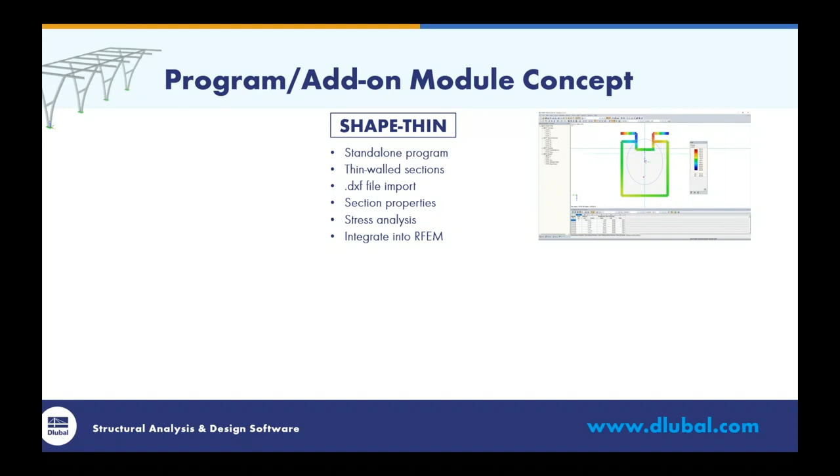Then we take these cross sections along with their properties and integrate them into our FEA program, RFEM. RFEM is a separate program, and this is where we can model our structure entirely. We also can integrate with BIM software such as Revit, Tekla, AutoCAD.

We can fully load the structure. We can set up our load combinations, again, according to the ASCE 7, as well as many other international standards, and eventually we get a full analysis. The analysis will provide us with design internal forces, deflections, support reactions, and we can take this analysis information into our own tools to do the design.

Now, if we'd like to do design within RFEM, this is where we'd want to take advantage of the design add-on modules. In particular, today we'll be looking at RF-ALUMINIUM ADM. This is nothing more than a dialog box within RFEM that allows us to do member design for aluminum per the ADM 2010, the 2015, and we have both ASD and LRFD.

This does include both ultimate and serviceability design, so we can check deflections as well. This also includes custom extruded sections, which we'll see today, where we take this section from Shape Thin into RFEM and design it per the ADM. Now, this is for unwelded member design. Hopefully at some point in the future we hope to add the welded checks, but for now keep in mind that it is only for unwelded members.

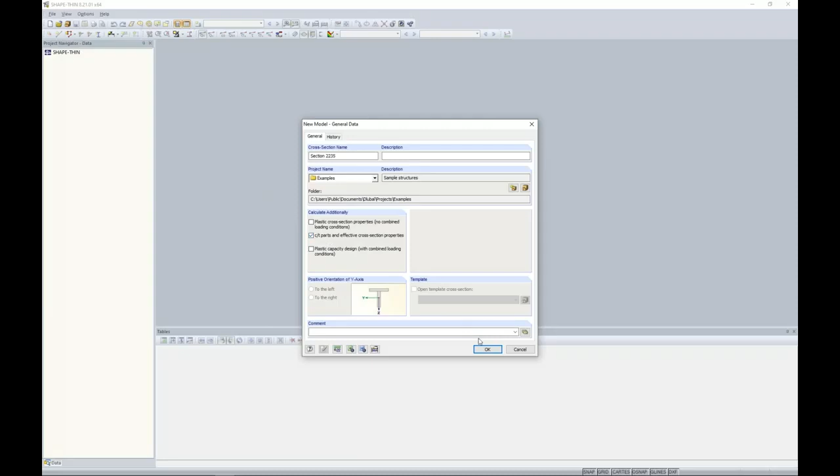This is so incredibly powerful because when we take this information of the width to thickness ratios into RFEM and eventually into the aluminum design module, we can actually check all of them for local buckling. This is not something other programs can do, but it requires a bit more additional work within ShapeThin to define this section, and we'll go ahead and see that now.

When I click import, we are brought into our graphical view where we can place the DXF background layer. There are a few options for how we want to place this DXF file, and I'm going to choose this one where I can further edit it. I select this center node, snap here to my origin point, right click to exit out of this dialog box, and now you can see this background layer here.

It's not so simple that we can just mesh based on this import to calculate the cross-section properties. We need to trace over this background layer again to determine the width to thickness ratios for eventually local buckling. But we do have some powerful tools that allow us to do that fairly easily.

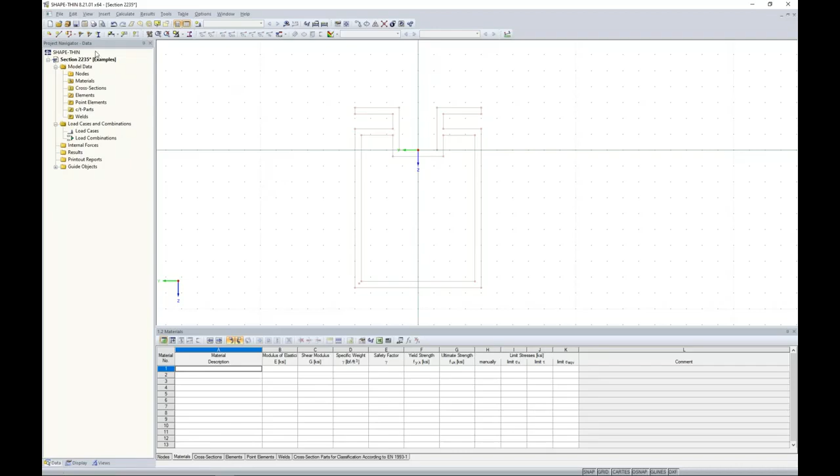Under Edit, we have Set Elements with DXF Template. The first option here is to set the center lines. I can zoom in and select two lines, and you'll notice that the program automatically places a center line between the two selection lines. I'm going to focus for the most part on the left side of the structure, because once I define my elements on the left side, I can mirror it to the right side.

In addition to setting the center lines, we have this fourth option to set the elements. We can manually draw in our elements with a new line, but we want to take advantage of these tools that make our life a little bit easier within ShapeThin.

So I want to set my material right now. I can open up my material database, and you'll see on the left we have our filters. We can filter to metal, to aluminum, to the ASTM, and eventually the ADM 2015. We have quite the long list here of all the aluminum materials directly from the standard. If I want to search for a particular material, I can type in 6061 and see all of the applicable materials, where I'll choose 6061 T6 for pipes and tubes.

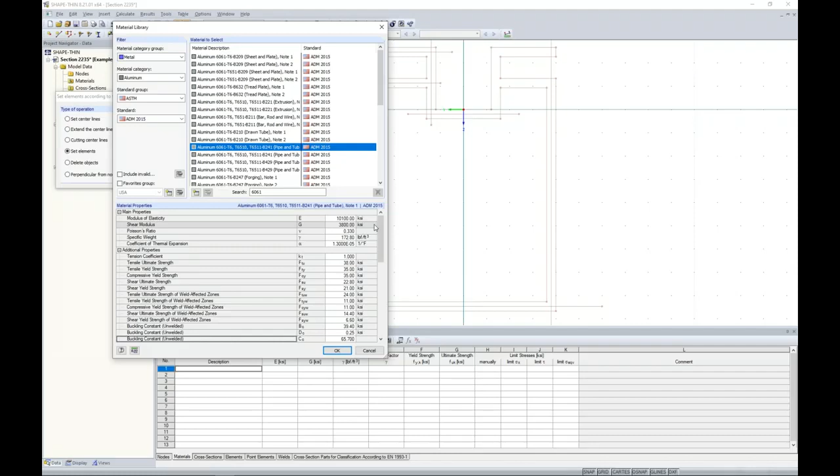Now all of my material properties are defined here. Quite honestly, the material definition is not so important within ShapeThin if you're not doing a general stress analysis, which we're not today. Eventually, once we get into RFEM, we're actually going to have to redefine the material anyway, but this is just a good introduction of where you can find the materials within the database.

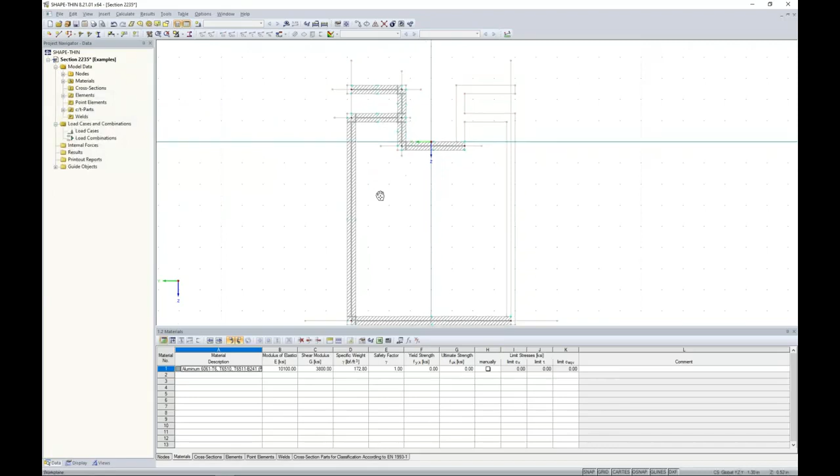Now what I can do is simply click on these center lines, and the program detects where the outside boundary lines are for the thickness of these elements. Once I've completed the left side of the structure, you'll notice up here, I want to drag this one element to the end. No problem, I can just drag and drop it, and it will snap right to that end point.

I can highlight all of my elements and use my mirror tool. The mirror tool is exactly like what we'd find in AutoCAD, where we can create a copy. We mirror about the global z-axis and the origin point. I click OK, and now the program has created all of the elements on the right-hand side. It does create a couple small segments that I can just simply delete with my keyboard.

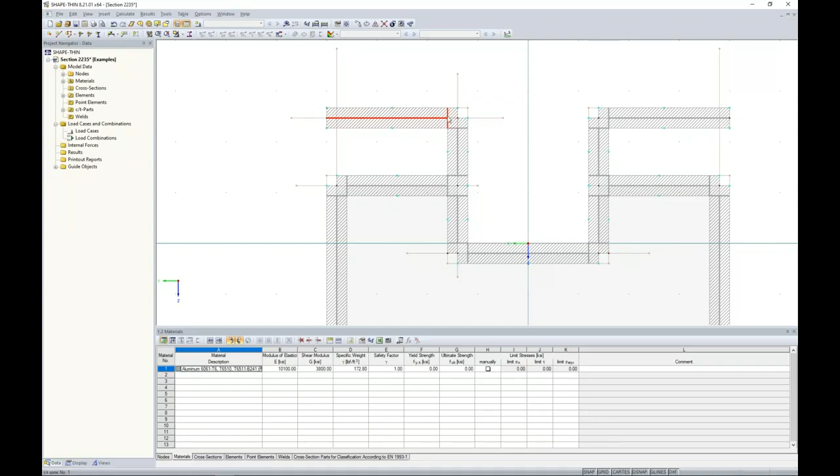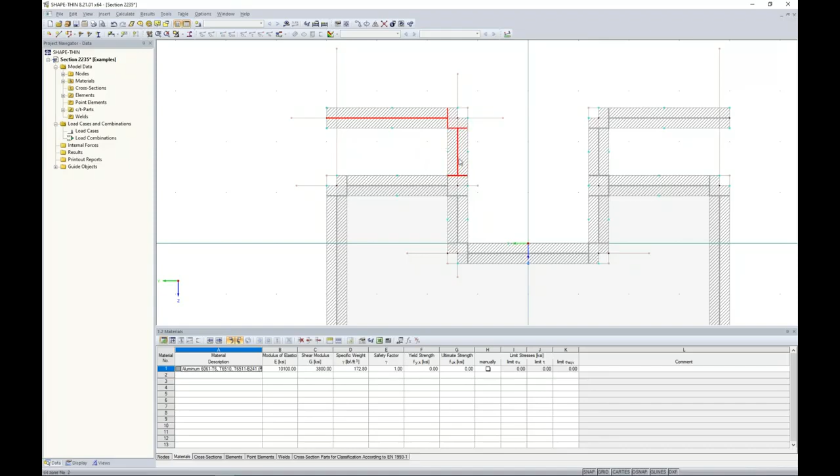Now you'll see these symbols at each element, and this is the width to thickness symbols, those C over T parts, recognizing width to thickness. But even more so, you'll notice that at these closed ends we have what looks like a T symbol, but at the open ends we don't have that same symbol. This is important for aluminum design to tell the program how the edges are supported. On the right-hand side it's supported, but on the left-hand side it's not supported, which again is important for local buckling. When we look at one of these other elements supported on both sides, we see that T-type symbol on both sides.

So that's all that we need to do, and now we're ready to run our calculation to determine the cross-section properties. So when I go to run the calculation, I will immediately get an error, and it says material number 1 FY is not positive.

This is the yield strength for my aluminum, and I can look down here to my table, and the program jumps to FY where it's set to 0. The reason for that is because aluminum has different yield strengths depending on if it's for tension, compression, or shear. So all we need to do is set some type of placeholder here. FY equal to 30 is perfectly fine. That's the reason why the program populates 0 there.

So we can rerun our calculation, and now we can see that we are presented with our results. Most importantly, if we take a look at table 4.1 for section properties, the program has automatically calculated all of the cross-section properties for us, including area, moment of inertia, warping, things like that. So everything has been done automatically according to my calculation.

Now it's very important that I save these results. You have to save the results with the cross-section properties, because in order to integrate in RFEM, we need to know those, and that only occurs with the saved results. We will get a message in RFEM when you try to integrate a shape-thin section without running a calculation first. So that's all that is required from the shape-thin side.

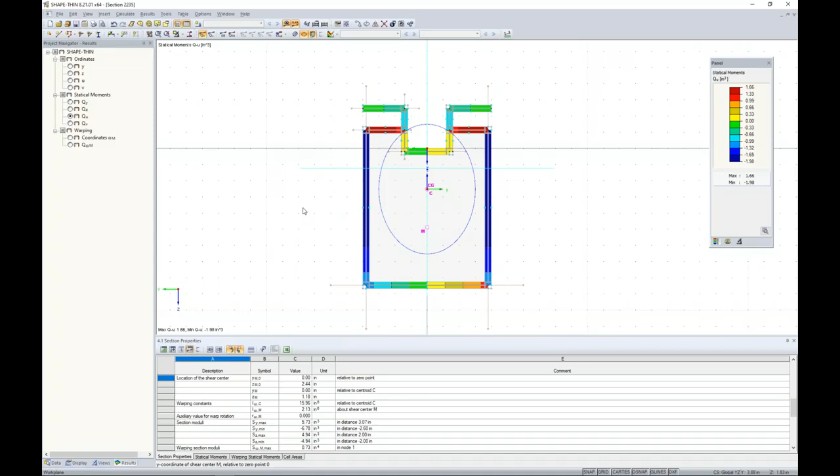So now what we can do is jump to RFEM. And in RFEM, you'll notice it has a very similar interface to shape-thin. So what's great is that if you know RFEM pretty well, then shape-thin should come pretty naturally.

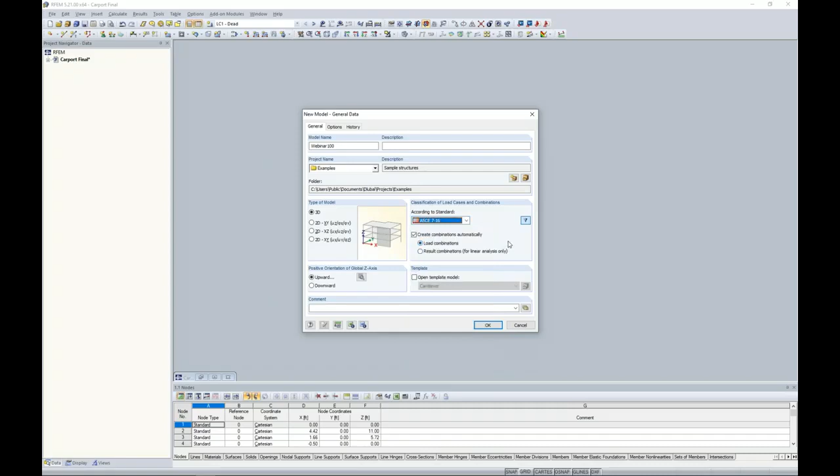We want to give this one a name, so we'll call this one Webinar 100. The type of model is 3D. We can generate the load combinations automatically according to the ASCE 7 2016. Now you can see in this drop-down box we have many other international standards as well, including the NBC 2015. You can always uncheck this checkbox here, and what this allows us to do is manually create the load combinations instead. But today we want to take advantage of the load combination generator, so we click OK, and we are brought into our main program RFEM.

So to give a quick overview for those of you who are not familiar with RFEM, we have our graphic window right here in the center, and we'll begin to model our structure, and we'll see that built up visually here. Down at the bottom is our table, and we can always import and export data to and from Microsoft Excel. This includes our results that will eventually be presented to us in table format as well.

Over on the left is our project navigator. So as we begin to generate this model here, all of my input data, including my loads, my load cases, combinations, will be all available to me within the project navigator so that I can make quick changes to entire cross sections or to entire material groups.

If we scroll down a bit further, this is our long list of add-on modules. This again is why we have the concept of only pay for what you use, because quite likely you won't utilize most of these add-on modules depending on the materials or the international standards that you utilize for your projects. And finally, we have our tools up at the top, which we'll be utilizing today.

And that brings us to the creation of our first column here, where we will go up to our quick tool here to draw a new member. So when we choose this option, we want to select the member type beam.

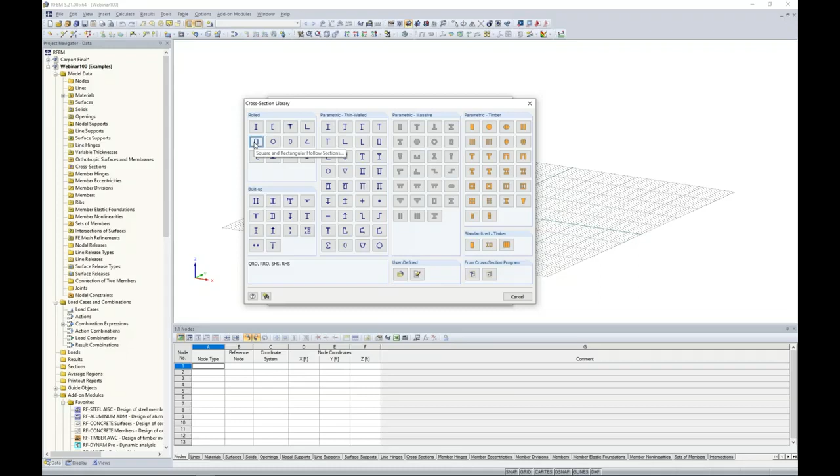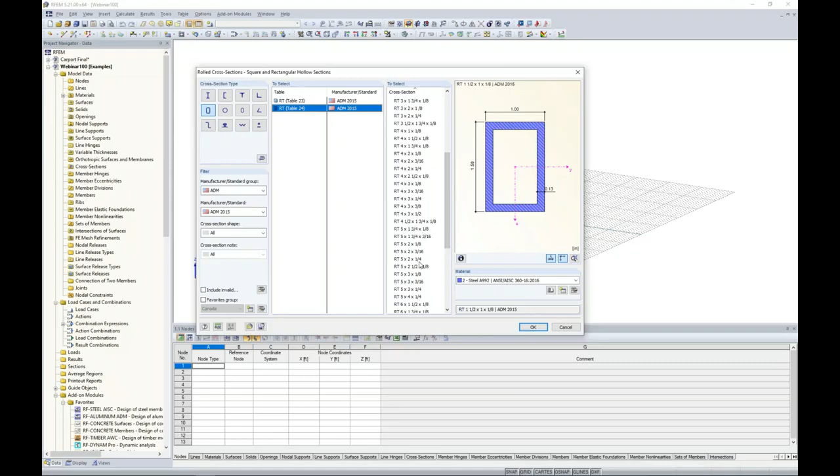We can open up our cross-section library. For aluminum sections, we will probably typically be working with the parametric thin-walled sections, or we can take advantage of the ADM sections directly from the standard itself. So with that, we will choose a hollow square section for today. I click on my HSS sections, I filter over here to the ADM, and we'll see an additional filter to the ADM 2015. Now for my first column, I want to select a 5 by 2 by 1/4, and I can just choose it right here in my drop-down box.

Now the material by default when we first open up the program is 4,000 psi concrete or steel A992. So what we need to do is to choose a new aluminum material from our database.

Well, that's quite easy by launching our material database, and this should look very familiar - it's almost exactly like what we saw within Shape Thin. We can use our filters over on the left to filter to metal, aluminum, ASTM, and the 2015. Once again, I can type in 6061 and select 6061T6 from my list here for pipes and tubes.

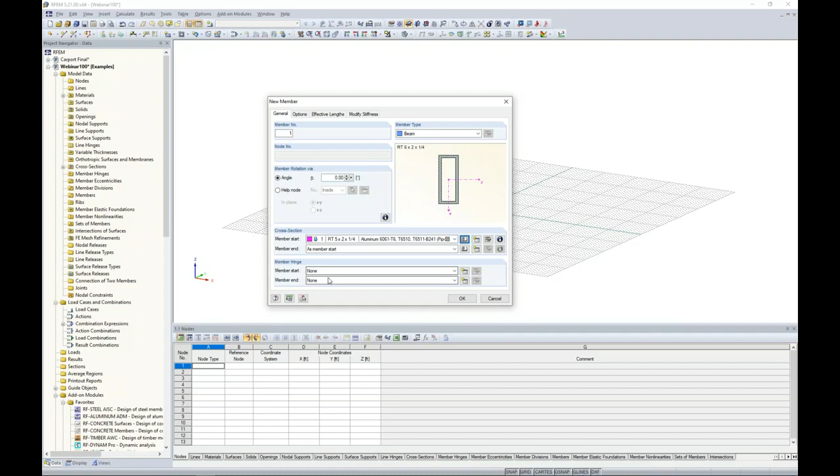All of my material properties are presented in this table. I click OK, I click OK. Just to preface this, our model today will be fully fixed, but if you wanted to set a pinned member end, you would do so within the same dialog box by creating a new member hinge. Leaving everything fully fixed is what the type none means, so we'll go with that for now. We want to begin by drawing our column, but I want to change my drawing grid here to the vertical direction. I can do so by changing my work plane into the XZ plane.

I can scroll down, and instead of a straight line, I actually want to create a curved column by selecting an arc here. So I snap to the origin at 0, 0, 0, and then my second point can either be defined on my work plane, but in my particular case I don't have exactly 1 foot increments for my second point, which is the default for my drawing grid. So what I can do is just type in the coordinate points directly at 4.42, 0, and 11.

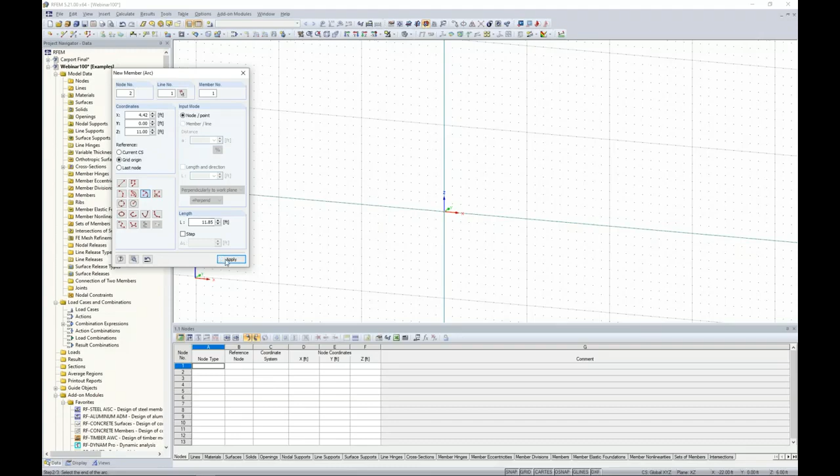Now you want to make sure not to drag your mouse outside this dialog box because, as you'll see, everything resets to the current position of my mouse on the work plane. So we'll retype that at 4.42, 0, and 11. We scroll down here to apply. Now you can either define the radius by clicking on the work plane, or I can just type in 30 feet on my keyboard and hit enter. And so now we should see the curved aluminum column shown here.

In a similar sense, we want to go back and draw a new member, taking advantage of the exact same cross section and material. I click OK, and we want to create another curved member, so we'll choose the arc option. Now my first point again doesn't fall at these 1 foot increments, so I can specify negative 0.5, 0, and 0. I click apply. Now my second point is going to be negative 3.5, 0, and 11, and I hit apply.

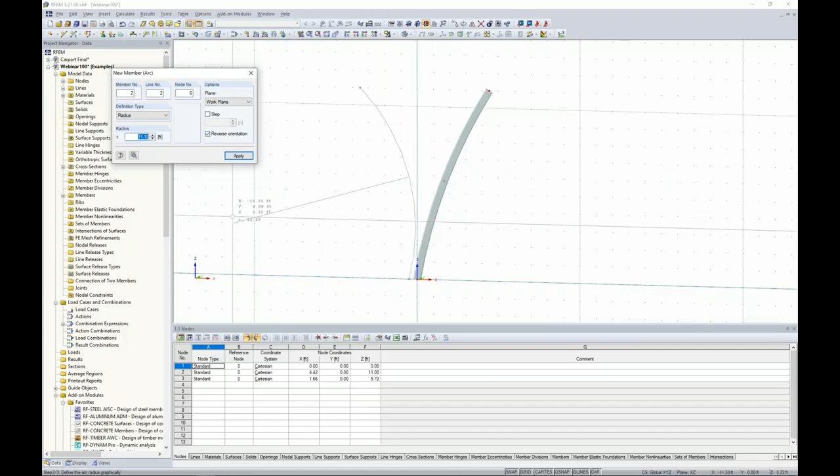Now you'll notice that my radius is actually curving the wrong way. That's no problem, all I need to do is check the checkbox for reverse orientation. I'll type in 40 feet on my keyboard and hit enter. And so now we have our second curved aluminum column here.

The next thing to do is to apply some type of intermediate brace between these two columns, and I want to do so at some nodes along the member length that I need to create. So I can right-click on my right column and divide the member by a certain distance. With this distance I have the opportunity to choose the projected direction Z. So what I want to do is add a node that is 5.5 feet in the vertical direction starting at the base of the column.

You can see here which side is the member start and the member end based on this black arrow. I type in 5.5 feet for my member start. I click OK, and now I have divided this member, which has created an intermediate node there.

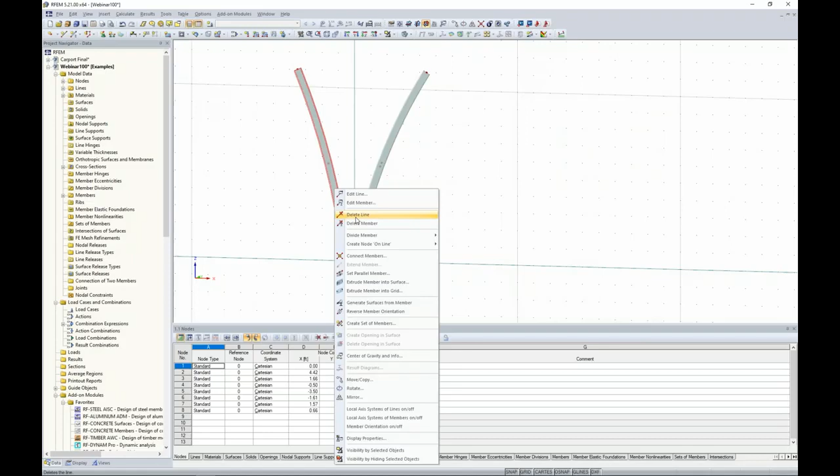I'm going to do the same thing with the left column. I'll right click and divide the member by a certain distance. Again we're going to choose the projected direction, but this time it's going to be 4 feet from the member end. You'll notice that we have the reverse orientation for this column, which is no problem at all. So now we have split apart this member as well.

I want to go back to drawing a new single member, and once again I'm taking advantage of the exact same cross section and material. I click OK, but this time instead of the member being a curved element, it will be straight, where I can snap to those new nodes that I have just created to add a small intermediate brace here.

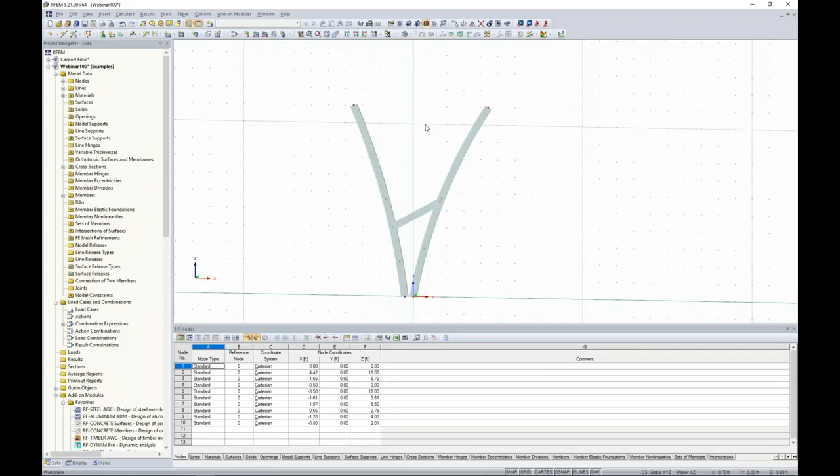Okay, so moving on to the top of our carport canopy structure, we want to import in that SHAPE-THIN section. So what I can do is draw a new member, which we are very familiar with, and open up my cross-section database. You'll notice that once this populates over on the right-hand side in the lower corner, we can import the cross-section from SHAPE-THIN.

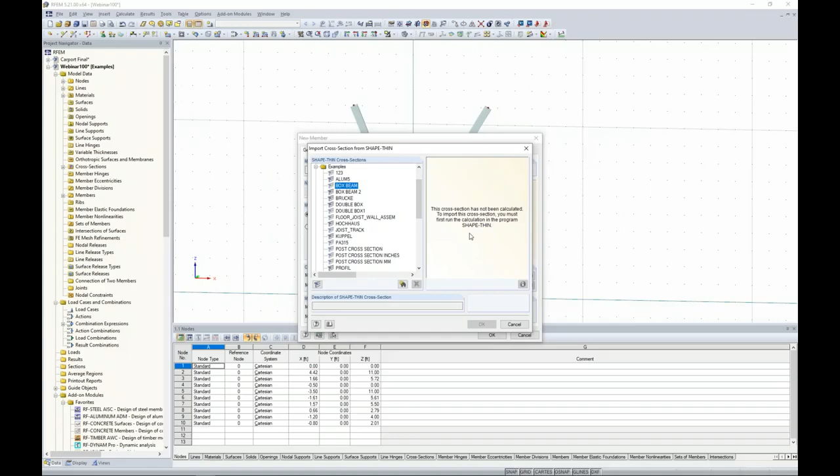So when I do this, we will browse to the file location of where I saved my custom cross-section, so we can see it here. By the way, if you were trying to import a cross-section where the results weren't saved, you would see some type of warning or note like this, just telling you the cross-section hasn't been calculated, go back to SHAPE-THIN and do so. This is why the results need to be saved with the SHAPE-THIN file.

So we can see here section 2 that we have just created. We want to import that in. Now notice when we did that, it defaulted to the first material, concrete 4000 PSI, that we have available in our model. So we actually want to edit the cross section, and instead of concrete, we're going to choose the aluminum material that we've already defined in the model, so it's now always available for any additional members that we create within this file. So I choose aluminum 6061. We can see here that everything looks okay with the material and the cross-section set now.

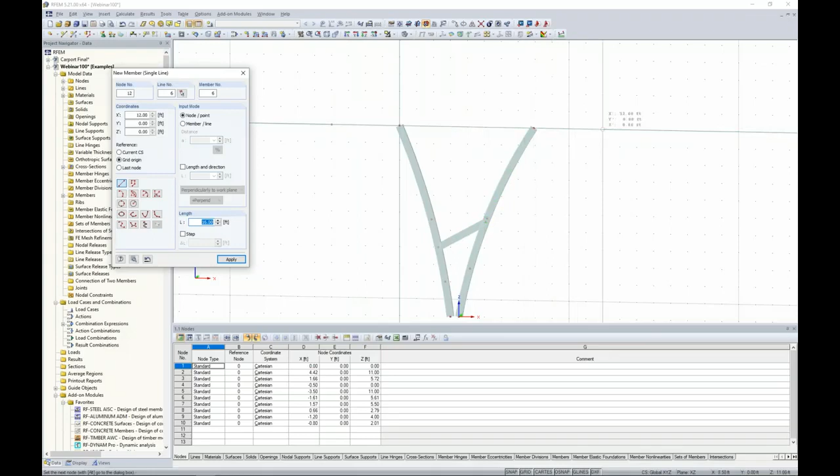I'd like to move my drawing grid so that the origin is now placed at the top of the left column. I can do so by selecting this button up here to set the origin of the grid work plane, and I move to the top of the left column. Now I'm still within the dialog box option to draw my new member, so I'm going to choose a point that is about 4 feet away from the top of the column on the left, and we will span about 3 feet to the column on the right.

What's also powerful, if I turn off my drawing grid here and zoom in, is that we do bring in the exact rendered view of this custom cross section. So it's somewhat nice to see the orientation of the member and how it's framing into these columns that we have just created.

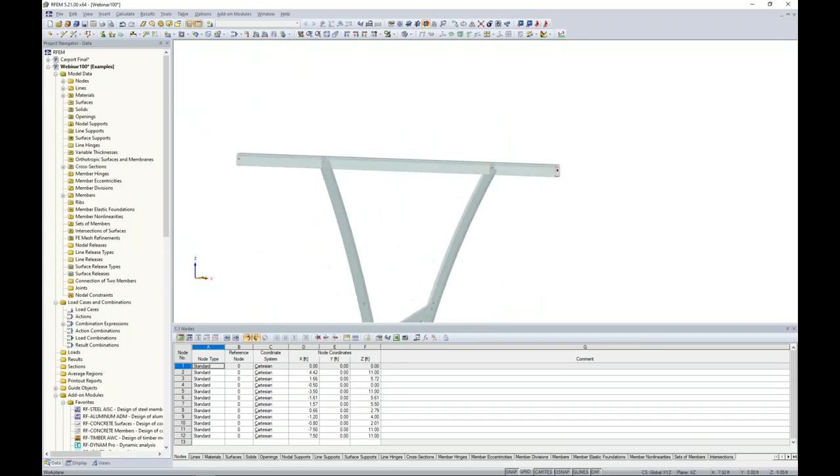So once we have created this main beam up top, I'm going to hold down my control key and select only my members. You'll notice that I'm paying careful attention to not select the nodes, but there are a couple nodes that I do want to include. So by holding down my control key, I'm going to select the node at the top of my right column and the rear node. Now there is a specific reason why I'm doing this.

I want to go to my Move Copy tool in my toolbar. Move copy, nothing too fancy about this. We want to make 6 copies in the global Y direction of 4.5 feet. Under the Edit Expanded Settings, what we have the ability to do is create lines between copied nodes. So this is why I was careful to only select a couple of nodes that I was interested in. And even more so, we can assign a cross-section to those lines.

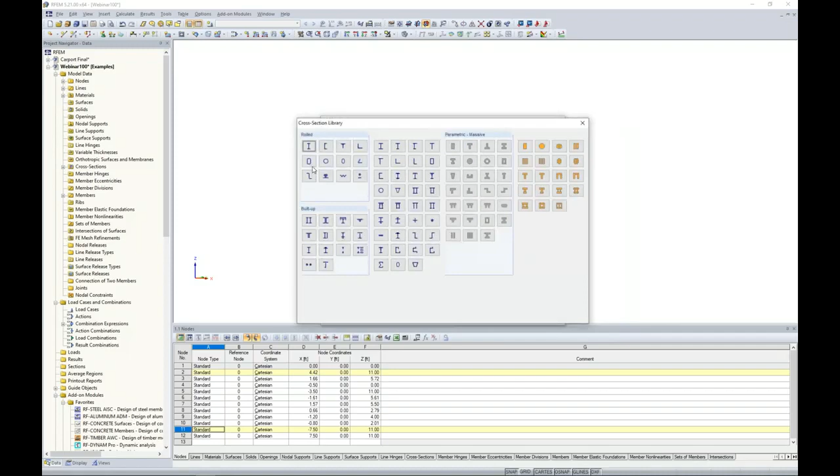And we can create a new cross-section type by going to a new member. This should bring us to a familiar dialog box where we can launch our cross-section library once again, because I do want to create a rectangular hollow section here. So I choose this option, and over on the left we will see our ADM filters once again, and I can scroll down in my list to choose a 3 by 3 by 0.125. I select my material from this drop-down box. Remember, it's already available to us because we have defined it within the model.

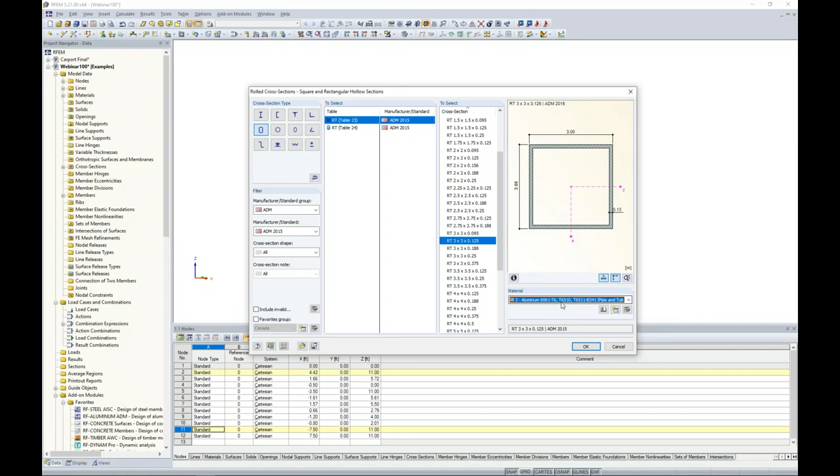I click OK, I click OK, and we're back in this Move Copy dialog box. I click OK once again, and what you'll notice happen is that not only did we make copies, but the program has placed these intermediate beams between our copied frames. So it's just taking a step out of the equation where we don't have to manually draw these beams in here. I want to take a few of these main frames, and I'm holding down my control key and selecting them, and I hit delete on my keyboard because they are not necessary.

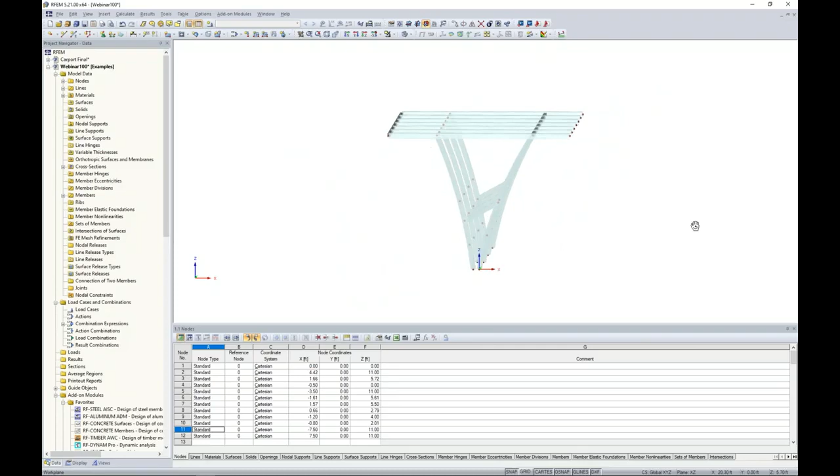So now we are presented with, for the most part, a majority of our modeling done with the carport canopy structure. A couple things to add. Number one is that if I wanted to slope this roof at 5 degrees, normally with sloping the roof it might be a little bit difficult because we'd have to figure out at what elevation all of these nodes should be placed, depending on their distance away from where the slope should begin. But we do, once again, have a nice feature within RFEM that allows us to do that automatically.

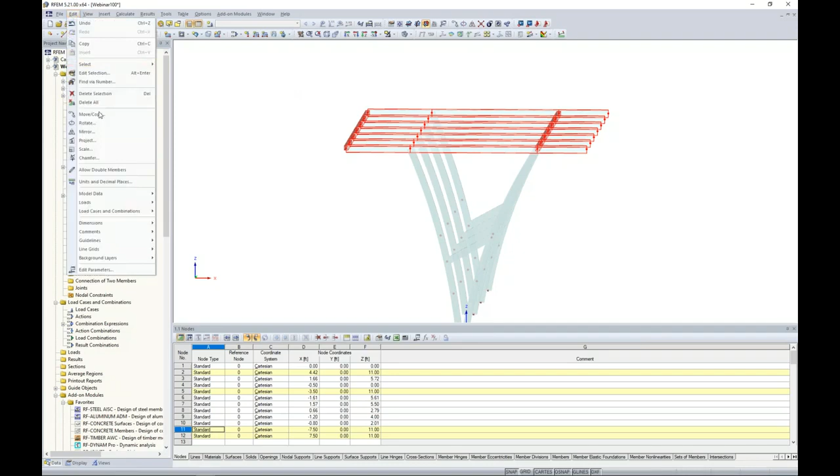So I select all of my roof members here, and under Edit, we have the chamfer tool. With the chamfer tool, we can define an angle of -5 degrees. We want to rotate it about the global y-axis, and we want to rotate it in the direction of z. Then I can graphically pick the point where I'd like the rotation to begin. So I choose at the top of my right column any one of these points. The program populates the coordinates.

I click OK, and now my roof has a 5-degree slope to it. So again, just a nice feature so that we don't have to manually determine what all these different elevations are based on a 5-degree slope.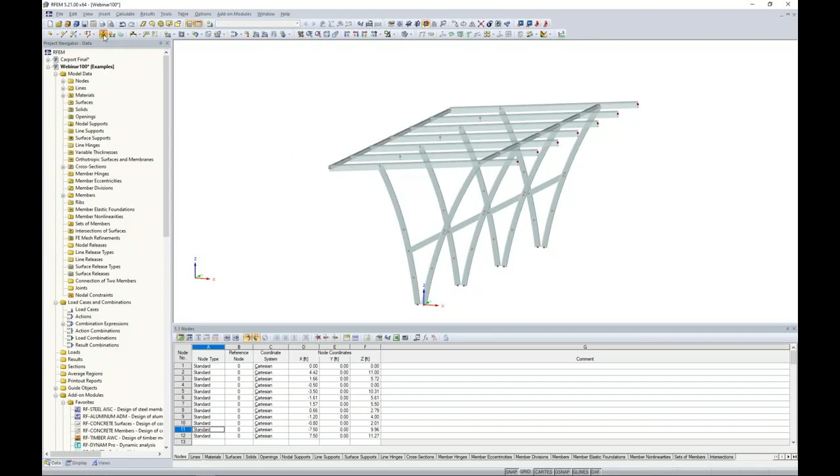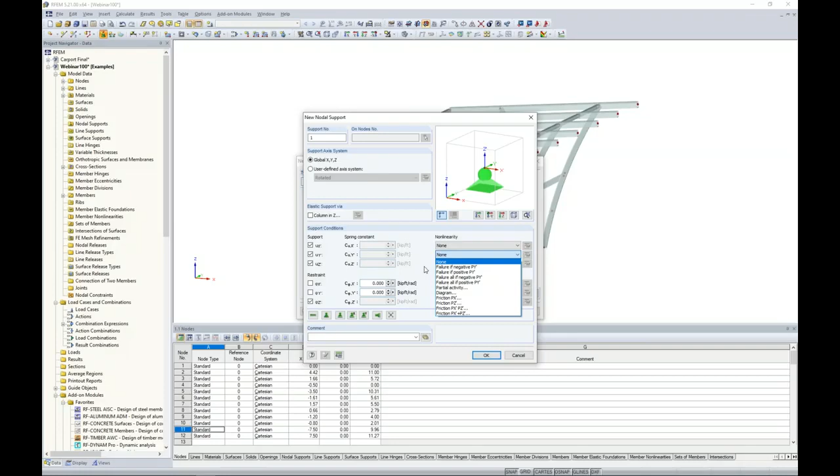The last and final thing to do with modeling of our structure is, of course, to support it. So we can go up here to a new nodal support. Now we have a few default options, including hinged and rigid, pin type support, or fully fixed. We can always create our own type of nodal support, which you'll see are 6 degrees of freedom here for rotation and translation. If you have partial fixity for somewhere in between fully fixed and fully released, you can set that. Or because RFEM is a nonlinear analysis program, you can set these geometric nonlinearities so that perhaps the support fails in uplift, for example, or sliding or friction or anything of the sort with partial activity. For today, we want to choose the default fully rigid option.

I click OK. All that I need to do is to highlight across the bottom of my structure, and now those fixed supports are applied to the bottom of those columns.

So we are essentially done with the modeling, and we want to move on to loading. And what we need to start off with loading is, of course, defining our different load cases. We can do so within the option up here to define a new load case. This will bring up our load cases and combinations dialog box. The first load case to create will be dead load. The action category is set to dead. Action categories are important because this tells the program exactly what load factors to apply to each load case based on the ASCE 7 or whatever standard you're using for the automatic load combination generation.

The self-weight is automatically checked here for dead load, but when we create a new load case, and we'll call this one live load with the action category of live, we want self-weight to be unchecked because we don't want to account for it twice.

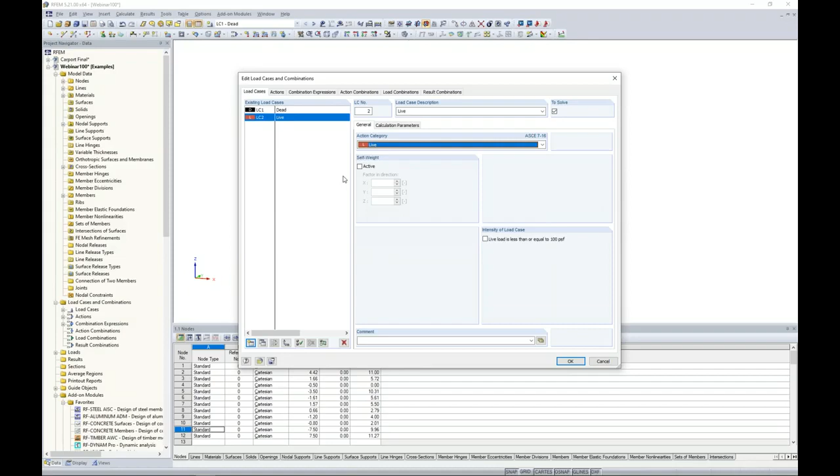Now, because this is a carport structure, maybe we want to consider the possibility of impact loads. Perhaps a car could unfortunately drive into one of these columns, and we want to account for that. So we'll create a couple of additional live load cases for impact. We'll call this one Impact 1, and the action category is set to live. We can make a copy of this load case and rename it to Impact 2.

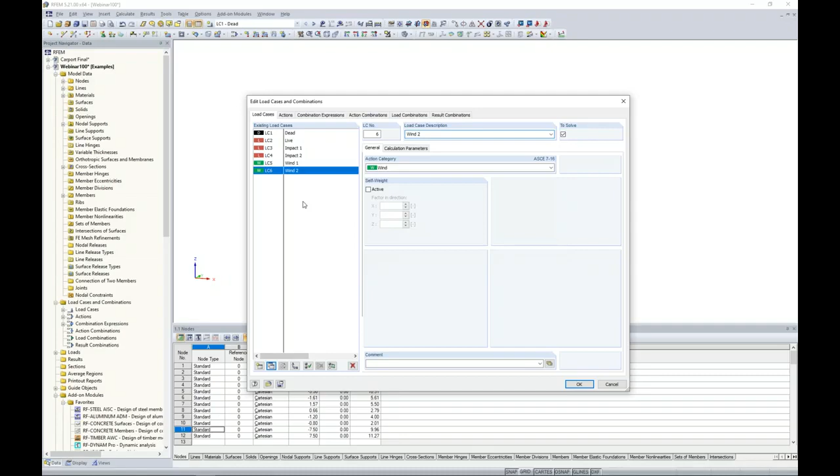I'm going to create a load case here for Wind 1 with the action category of Wind. Once again, I'll make a copy of this one and create a second load case for Wind 2. Now, of course, you'll probably have many more load cases for your project design, but for today's example, we will just stick with these.

So under the Actions tab, this is important because here are my actions that I've defined: dead, live, and wind. Now, under live, I have my live load, which will be some type of area load at the top of my roof structure. I want that to always be acting within these load combinations, but Impact 1 and Impact 2, I don't want everything to act simultaneously as we have it set here. Instead, I want Impact 1 to apply or Impact 2 to apply along with the first live load. So how we can do that is by setting the option differently here.

Live load can be set to no group, Impact 1 can be set to group 1, and so can Impact 2. So now the program will apply Impact 1 or Impact 2. Alternatively, it will not apply them at the same time. It's a similar concept for wind load. Wind loads are automatically by default set to alternatively, so it won't apply wind load 1 plus wind load 2, it will apply wind load 1 or wind 2 within our load combinations.

The combination expressions, this is just the program letting me know that it will create LRFD load combinations as well as ASD load combinations. If we have any question about what those load combinations look like, we can click this little info button to see them listed directly from the standard.

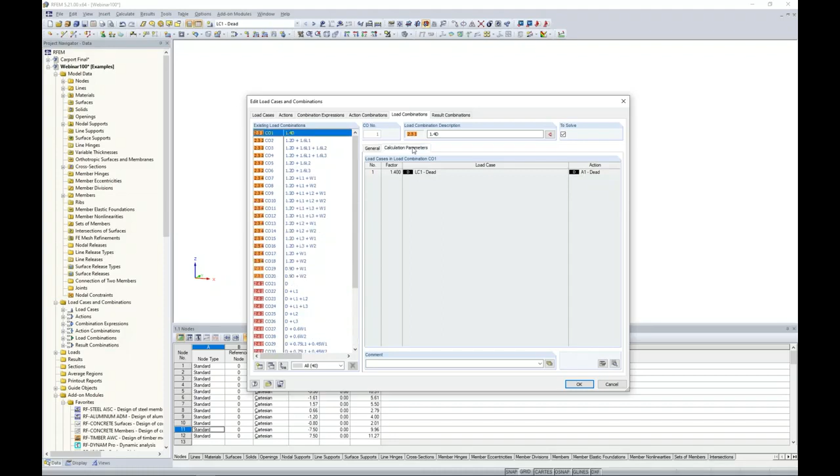Now, probably most important is the actual load combinations tab here, because this is going to show me all of my LRFD load combinations in orange and then my ASD load combinations in red. The calculation parameters for load combinations by default is set to second order analysis, considering both big P-delta and little p-delta for all members.

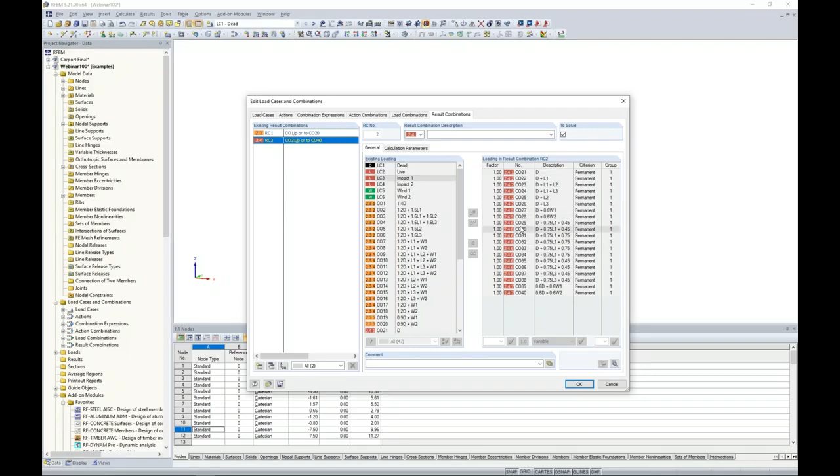The result combination is nothing more than an envelope solution. The program creates a result combination for all of my LRFD load combinations, and we have a result combination for my ASD load combinations. This allows us to graphically or within tables see the max and min results within all of these load combinations combined, essentially just a result summary.

Once we are done defining our different load cases here, we need to actually apply the loads to the structure. So we're going to select dead load from my drop-down box here, and I want to apply a downward area load to the top of my structure to account for, let's say, some PV panels that will be placed on top.

Under Tools, we can go to Generate Loads from Area Loads on Members via a Plane. Rather than having to manually define what all these different member loads are based on their tributary area, the program can do that for us. So we choose the load direction in the global Z, which will be the downward direction, and give it a magnitude of negative 0.02 kips per square foot.

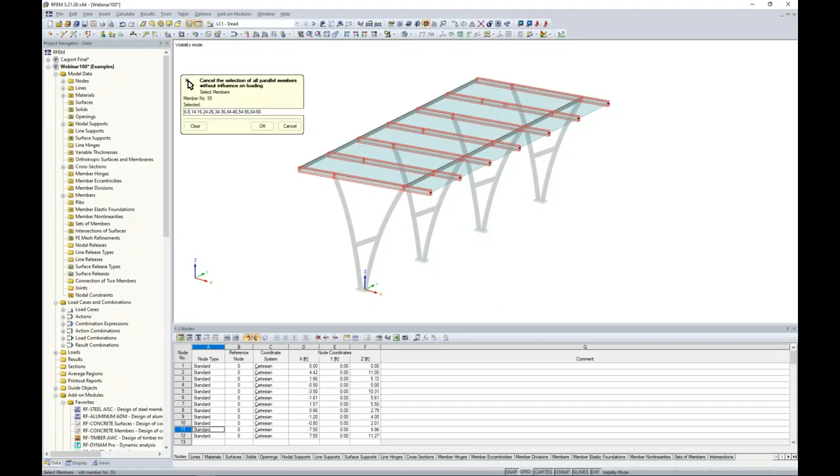I am going to select my corner nodes here by just graphically clicking on the four points. Now we also have the ability to exclude members parallel to a particular member. What I mean is I can select one of these intermediate beams framing in and out of the page. Once I select one, you'll notice all the rest are unselected if we do not want the load applied to those, but rather to our main beams instead.

I click OK, and now you can see our area load generated, but even more importantly, if we right click and display separately, we can see the area load magnitude split up for each individual member based on its tributary width. We now want to scroll to live load, and it's the exact same concept here.

We'll go back to Tools, Generate Loads from Area Loads on Members via a Plane. What's nice is that the program remembers all of my settings from the previous application, so all I need to do here is change my magnitude to something slightly smaller. I click OK, and now for live load, you can see the member loads applied based on their tributary area.

Now for impact load, this comes from ASCE 7-2016, specifically section 4.5.3 for vehicle barrier systems. The code tells us that for impact loads, we should consider a 6 kip load applied anywhere between 1 foot 6 inches to 2 feet 3 inches above the floor.

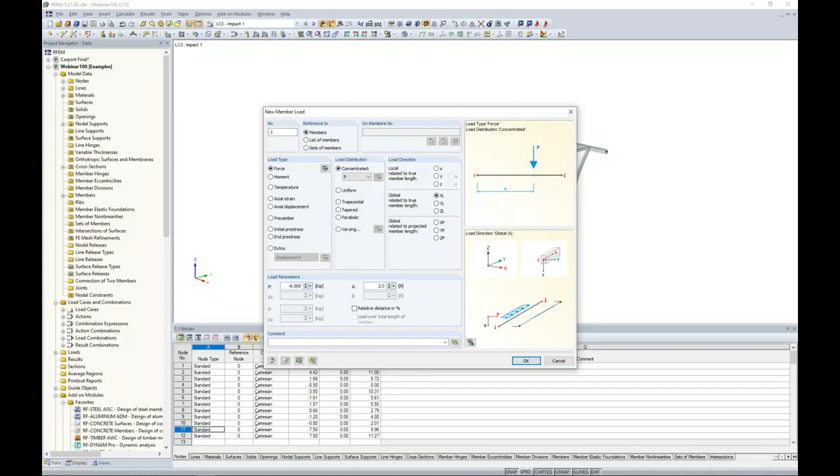For this application, I want to consider an impact load on my center columns here. I'm going to go to a new member load, and instead of applying a uniform load, I can just change this to a concentrated load. With a concentrated load, we want to apply this in the global X direction, the lateral direction, give it a magnitude of negative 6 kips, and apply it 2 feet from the member start. So I click OK.

Then I can just click on my column directly to apply that impact load. I scroll to the next load case, impact 2, and you'll notice my option to apply loads is still active, so I can easily click on my column for the next load case to apply my second impact load. I right click to exit, and now as we scroll to the two different impact loads, you can see why we wouldn't want these acting at the same time, but rather wanted either one or the other.

Now, of course, maybe we'd want to add some impact loads to our exterior columns as well, but we'll just keep that for the simple application for today.

Now for wind loads, we do have an automatic wind and snow load generator. The snow load generator would be efficient for this canopy type structure. The wind loads unfortunately cannot be used because we only have partially enclosed and enclosed structure options for our wind load generator. Typically for canopies, you would be considered an open structure, so we will need to manually apply our loads for today. So what we want to do is just go back to the area loads on members via plane in order to apply those.

Before I do, when we're manually taking a look at these calculations for our wind loads based on open structures, or maybe we have some spreadsheets to do so, I just want to touch on a tool that we have on our website. If you go to dlubal.com and under solutions, you'll see the GeoZone tool.

What we have done is integrate the maps for snow, wind, and seismic directly from the ASCE 7. You'll also see the NBC standard as well as many other international standards. This is also integrated with Google Maps technology, so for our project we can type in the location address, or we can click directly on the map.

We're looking at wind for risk category 1 here. We can see that the basic wind velocity is set at 105 miles per hour. So this is just a little bit more efficient than opening up the code and having to flip through all those different maps. You can take advantage of this.

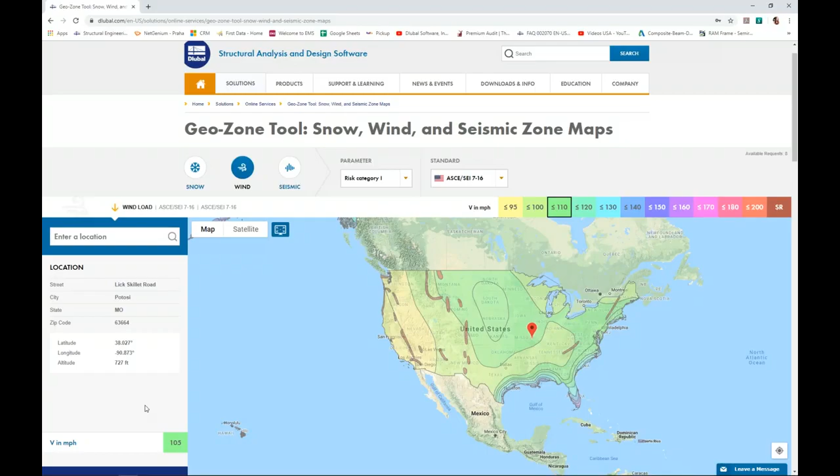So assuming we have taken this information and determined what our magnitude should be for our structure today, we want to apply this in the lateral X direction. Applying this to my roof structure, we set the magnitude to negative 0.01 kips per square foot. The program remembers all my settings from my roof. Maybe I exclude the option to set members parallel to member, which removes the influence from it. I click OK, and now we should see this area load applied in the lateral direction to our structure.

In reality, we'd probably want to apply some lateral loads to our columns as well, but for simplicity, we'll just move on with this lateral application.

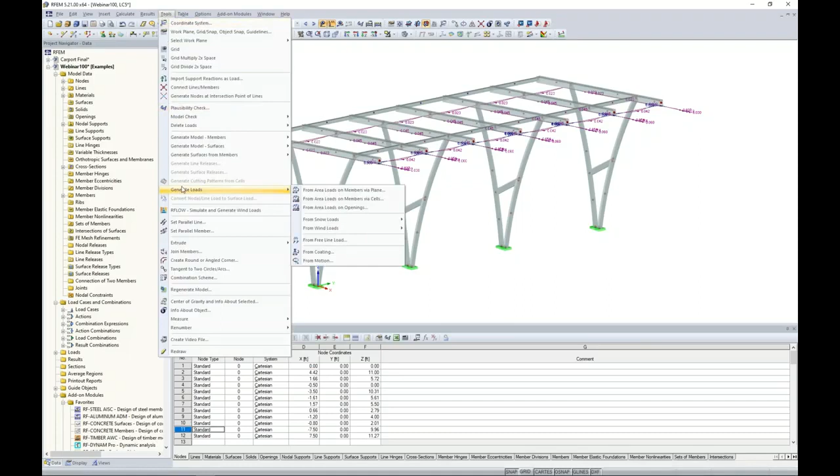So under tools, we also want to apply a downward load. For this, we can modify the load direction to the global Z direction, modify the magnitude to negative 0.005, and maybe exclude those intermediate beams from my downward wind loads. I click OK, and now within this same wind load case 1, we can see a downward wind load along with the lateral load applied.

Now, a nice trick is that for wind load 2, I'd like to essentially keep the same load application, but just modify either the magnitude or the load direction. So instead of going back and once again applying our area loads with the load generator, we can go to load cases and combinations.

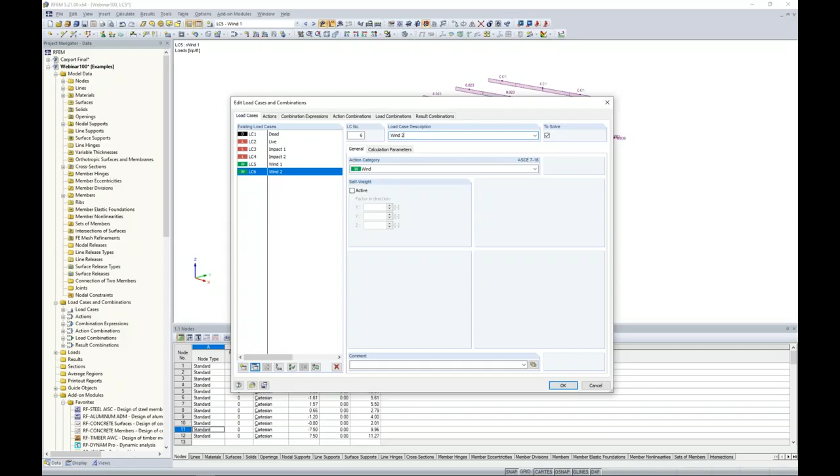I'm going to take wind 2 and completely delete it. So now when I take wind 1 and make a copy, renaming it to wind load 2, the benefit is that since I've already applied my loads to the load case, it will copy the loads along with the load case to wind load 2. When I click OK, I've copied all those loads from wind load 1, and now I'm looking at wind 2.

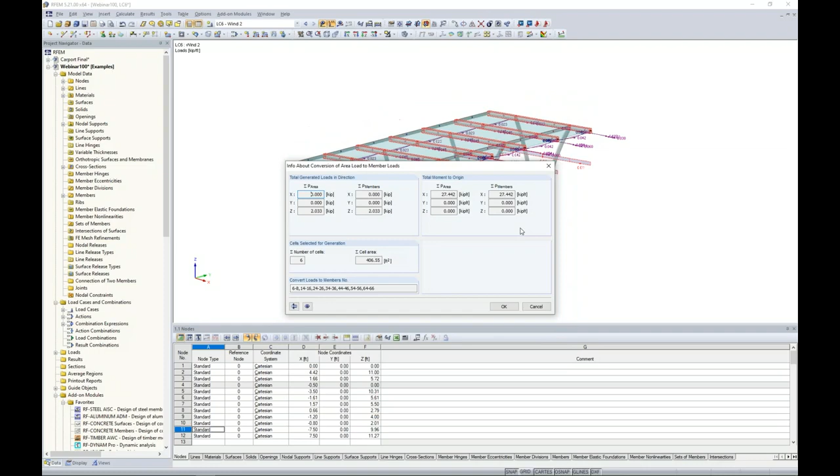All I need to do is double click at my top load here and reverse the orientation, reversing the magnitude for an uplift force instead. So that's just a nice way to quickly redefine loads by copying the actual load case itself.

So now that we have defined all of our different load cases, we can scroll through to the different load combinations and see these applied to the structure at once, including live loads, impact loads, and wind loads. Everything is shown here.

Now, before we are ready to run our analysis, there is one thing I want to discuss from the ADM, and this is the stability requirements according to section C2.

I actually did a previous webinar, around 2 years ago, but everything is still applicable to design today according to the ADM 2015. I went into much more detail about the stability requirements in Chapter C, so certainly refer to that on our YouTube channel or our website. You can just search ADM and that will bring up that previous webinar.

But today, what I do want to apply is the reduced stiffness requirements from section C2. The code tells us that we need to reduce the flexural stiffness by a tau sub b factor. The tau sub b factor is an equation, and it needs to be iterated based on the axial forces within our member.

Additionally, there's a 0.8 factor that should be applied to bending and axial. And lucky for us, these requirements are almost identical to what the AISC requires.

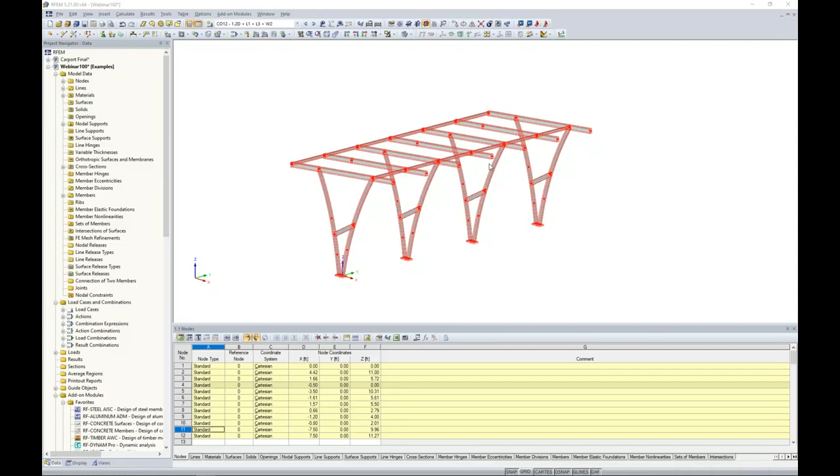What we have in the program, when we highlight all of our members, we can right-click to edit the member. When this dialog box pops up, you'll see a Modify Stiffness tab, which allows us to modify the stiffness according to the AISC 360.

Again, the ADM 2015 lines up exactly with the requirements from the AISC. We will determine what that tau sub b factor is, and we will also apply a 0.8 factor to the flexural and axial stiffness. This will be applied to all members that contribute to lateral stability. It's also a conservative approach to apply this to all members, including gravity members.

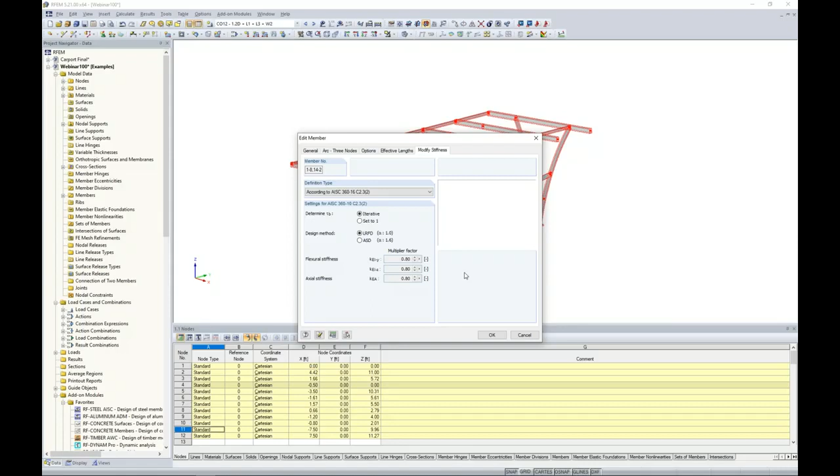So I click OK. You might be asking yourself, okay, the stiffness reduction is great for my design combinations for the ultimate limit state, but for serviceability or deflection, I don't want to reduce that stiffness. So how do we separate that out?

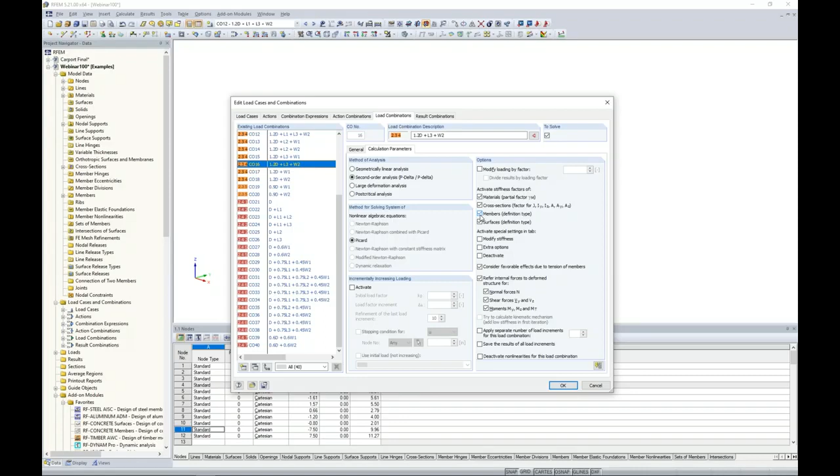We can do so directly within our load cases and load combinations tab. I can select all of my ASD load combinations by holding down shift. Under the calculation parameters, we have the ability to uncheck the members here for the stiffness factors. This will no longer reduce the stiffness for all of my ASD load combinations, which are typically used for deflection. But if we look at our LRFD load combinations, that checkbox is activated again, so we will reduce the stiffness based on the stability requirements within the ADM.

With that said, we are finally ready to run our calculation. We go to calculate all, and the program will cycle through about 40 or so load combinations, running a nonlinear analysis to account for secondary effects of P-delta and P-little-delta.

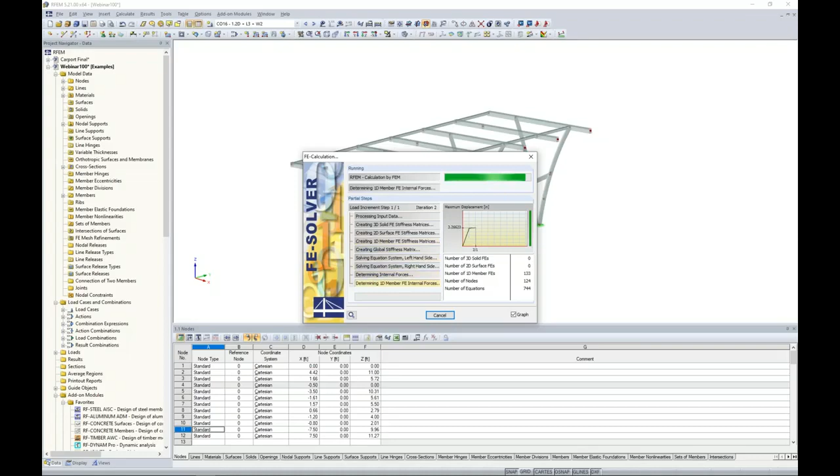Once this is done running, we will be presented with our results directly within RFEM. We'll notice now that we have a results tab available to us. Currently we're looking at the deformations of our structure, which is a little difficult to see here because it's just based on the center line.

Under the display tab, this controls everything we're viewing graphically. We can turn on and off different elements, change the view, and use the results tree. We can expand out the deformations for members and change this to cross sections colored. I can even smooth my color transition to make it look a little nicer.

Now I can scroll through to my different load combinations to see the reaction of the structure under the different applied loads. If we're also interested in seeing how the structure behaves as a short video, we can play the animation here. This is useful because if we incorrectly modeled something, we'd probably see some odd deflections in this video.

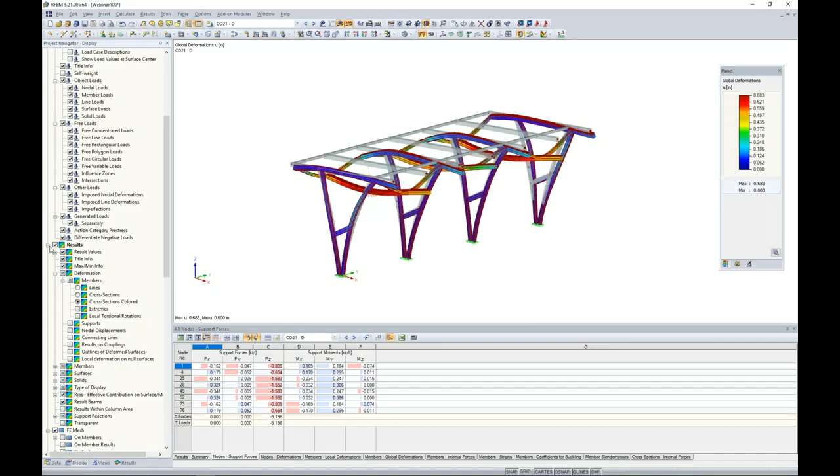It's a nice feature that we can export this out and save to our computer as a video file as well. So in addition to deflections, probably what we're also very interested in is member internal forces.

We can go back to our results tab and I can scroll in here to view these members in closer detail, and we can take a look at axial forces, shear forces, and bending moments. These are all available to me graphically.

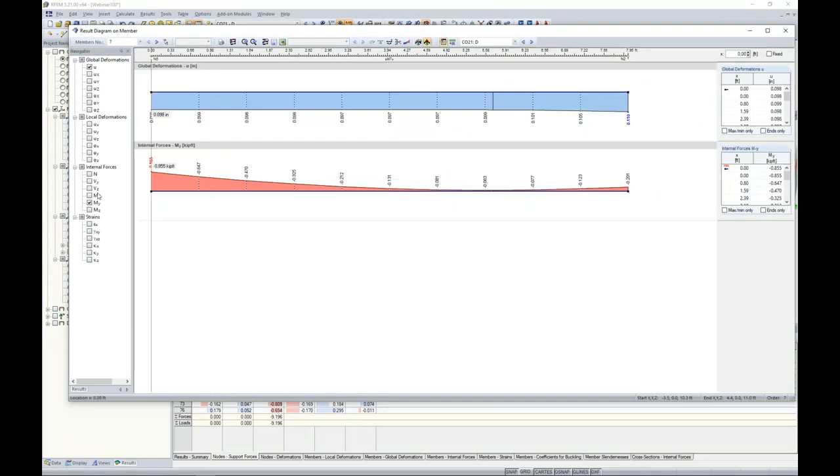I can also right-click on any one of these members to go to the results diagram. The results diagram will essentially show me in more detail where I can turn on and off these internal forces and deflections, what's going on along the member length. I can also scroll through to different load combinations here and export them out to my printout report, maybe in a bit more detail than what we can see graphically.

In the same concept, we also can view our support reactions. We can turn those on graphically, and again all this information is available to us within our tables. We're currently looking at table 4.1 for support forces. You'll notice that the table is synced up with RFEM, with the big red arrow showing me exactly where I'm at according to this table that I'm clicking in.

So we can export all of this information, support reactions, internal forces, to our own design tools, such as Microsoft Excel, or maybe some in-house tools to provide the design.

But if we want to take it a step further within RFEM, this is where we want to take advantage of our design add-on module, RF-ALUMINUM ADM. So we can activate the add-on module within our project navigator over on the left, or we can access the add-on modules under our drop-down at the top.

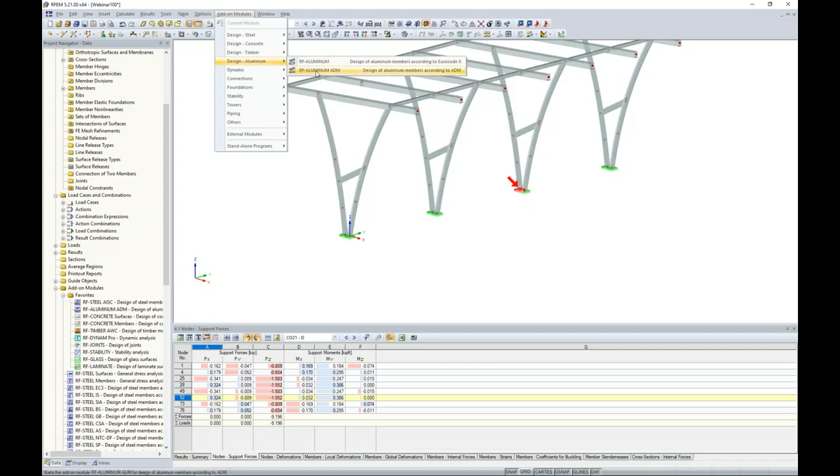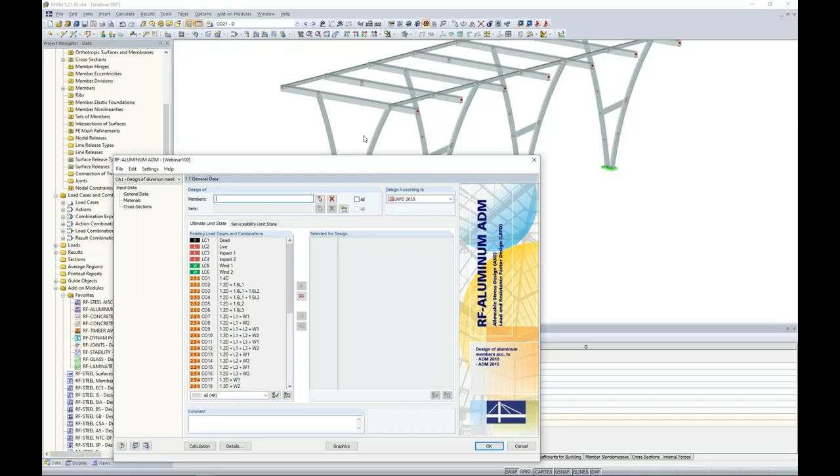This is nice because they are categorized a little bit nicer, where we can go to design of aluminum per the ADM. When I choose one of these add-on modules, notice that it's just a dialog box that pops up within our main program. I don't have to worry about remodeling any of this information or redefining cross-sections, materials, load combinations. It's all brought in. What we're doing here is specifying information specific to the ADM module, including things like unbraced lengths or which load combinations we want to consider for design.

So I'd like to start off with a fairly simple case here for introduction into this module. I'm going to rename my case here to secondary beams. I click OK, and I want to select the beams that I would like to design for this first case. Well, I want to design these intermediate beams.

Now I can individually highlight these and select them, but a better option under the Views tab is to select my members by cross section, and I will choose the 3x3 cross sections. Now you'll notice that everything is grayed out within the rest of my model. So now I can easily highlight the entire model with only selecting those 3x3 cross sections.

We want to choose the LRFD 2015 for our design. For our ultimate limit state, this is where we choose our LRFD load combinations, and serviceability limit state would be our ASD load combinations, again brought in directly from RFEM, considering stiffness modifications and everything else that we've previously set.

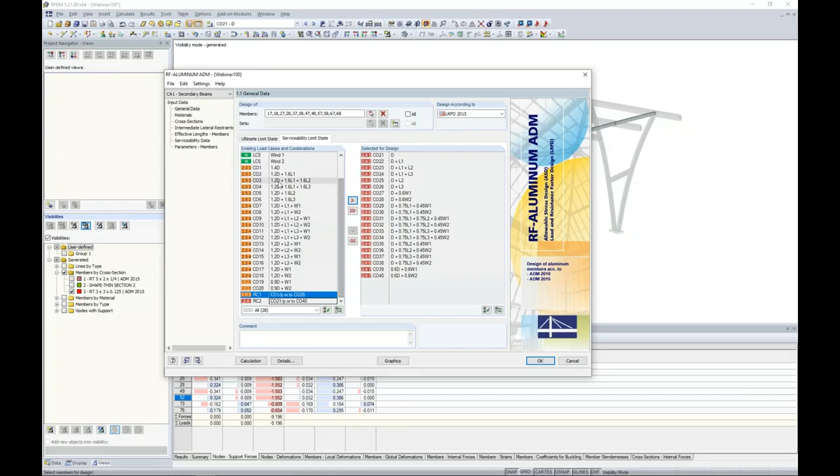All we need to do now is simply move down our list over on the left. The materials are brought in from RFEM. We're still utilizing aluminum 6061. We have our cross sections here with our 3x3, with the cross section properties shown.

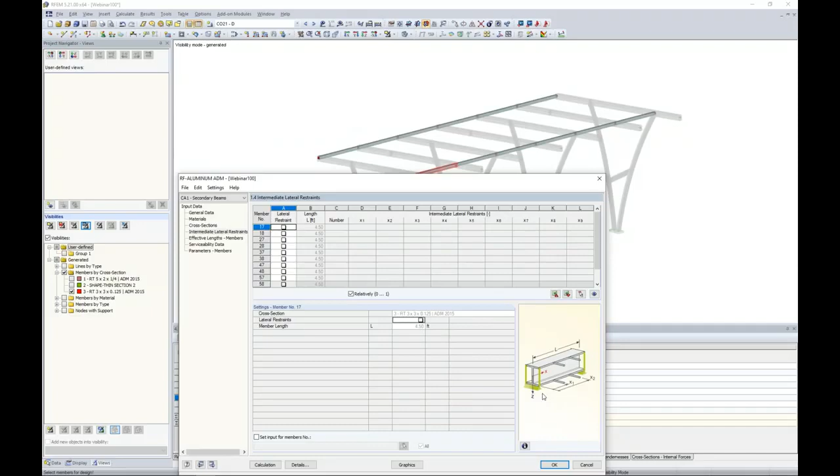Intermediate lateral restraints, if we had any top and bottom flange bracing. Now this isn't so applicable, for example, today with tube structures, but maybe you had some type of I-beam as shown, then you would set the intermediate lateral restraints under this table here.

The effective length - this is our stability design. We have strong axis buckling, weak axis buckling, lateral torsional buckling, and flexural torsional buckling.

So to explain a little bit about all of these different options, you'll notice here that we have the effective length factors. Section C3 from the ADM tells us that we can use K equal to 1.0 unless a smaller value can of course be justified. So we'll go ahead and leave all of these values set to 1.0.

Now the effective length, which is our K times our unbraced length, is our next column here. By default, everything will go ahead and populate according to the member's length back in RFEM. So in this case, they're all 4.5 feet. Same thing for unbraced length in the weak axis direction.

So if by chance you didn't model in some members here, or maybe those PV panels are bracing these members laterally for both strong and weak axis direction, then you can go ahead and adjust the unbraced lengths here. But for today, we'll just keep all of those defaulted to the full member length.

Lateral torsional and flexural torsional buckling are very interesting because we have the ability, again, to set unbraced lengths here for LW, which would be the lateral torsional buckling length, or LT, which is the flexural torsional or torsional buckling length. So if those differ from the full member length, you can adjust those here.

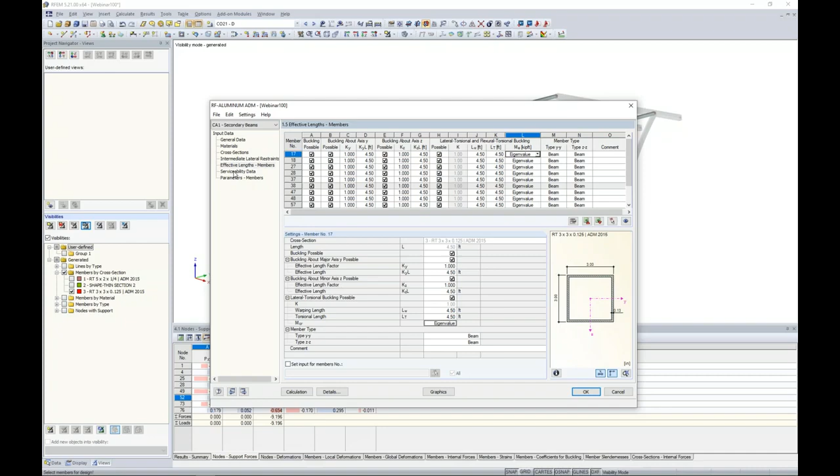Now, serviceability data. This is where I select the member reference within my dropdown, and then I graphically select all of the members here that I'm interested in for serviceability design. So I've highlighted all of these members, same thing that we're doing for ultimate limit state design.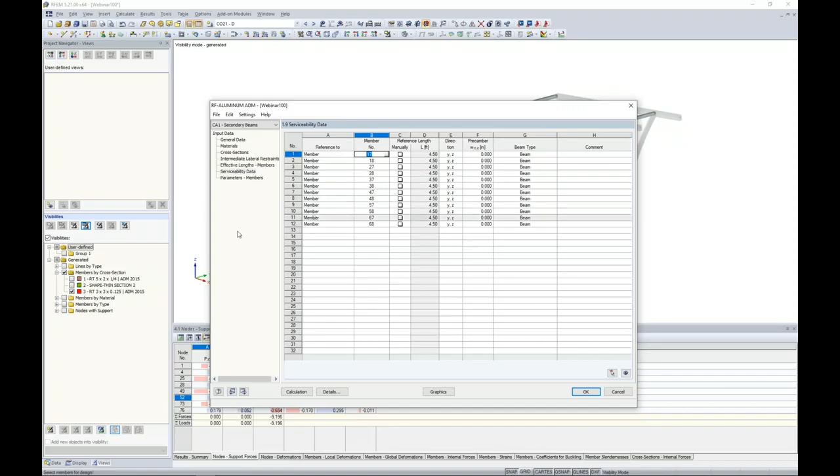Now, the reference length, once again, defaults to the full member length. We can put in here a pre-camber. We specify if it's a beam or a cantilever. I'll show you in just a minute exactly where we set the limiting deflection ratios to, because we need to have something to compare this to, of course, to the deflections that the members are experiencing from the analysis.

Under the parameters for members, this is actually for tensile strength according to chapter D. In section D3-2B, the code states that tension transmitted through some but not all of the cross section - if this is the case, then the effective net area A sub E needs to be calculated. A sub E depends on eccentricity of the connection, the length of the connection, so you can see all of this input data here. What we'll do within the program is automatically calculate your effective net cross-sectional area, A sub E, which is ultimately used for the tensile rupture capacity. So if we do have that situation at either the member start or the member end, this is where we can reduce that area here.

Under the Details tab, quite a few options throughout here that we just really don't have time to go through today, but certainly the help file, which you can access with this little question mark down at the bottom, is sufficient for giving a little bit more information on all of these settings.

But under the Serviceability tab, this is where we can set our limiting deflection ratio. You can see L over 360 is set for beams, L over 180 is set for cantilevers, and you can override these limiting deflection ratios as you see fit for your design project.

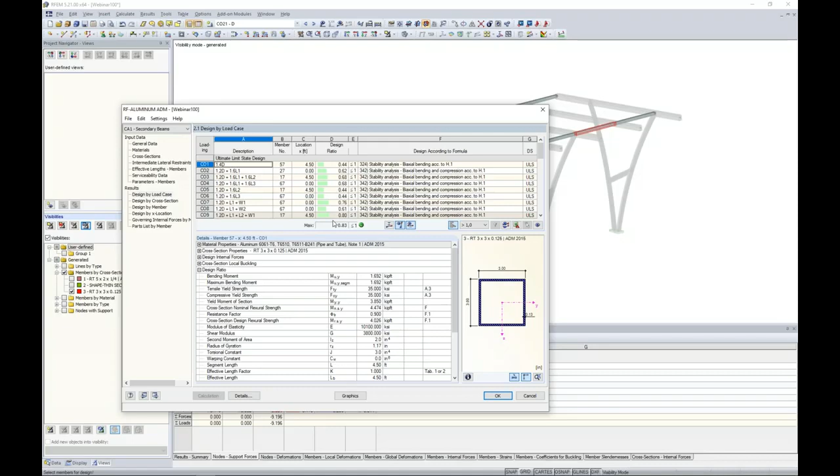So once we have defined all of this information, we hit calculation, and you'll actually see that the program solves this rather quick because we already have all of our internal forces from RFEM. We're just bringing them into this add-on module, applying the ADM calculations, including the quick little eigenvalue analysis for stability, and then ultimately we're coming up with our results.

Now we can view design by member. And again, when I'm looking at these tables, you'll notice that everything is synced up in the background. So I can take a look at this particular check. This big red arrow is telling me where the controlling internal force is for the axial check, for example, and biaxial bending according to chapter H.

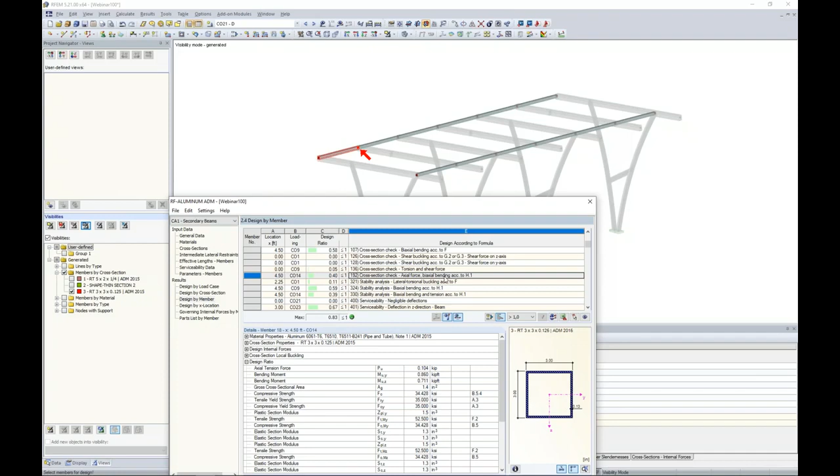What's also really powerful is that for each member, we're giving you the results for every check within the ADM. So you're going to see here shear checks, bending checks, biaxial bending, axial forces, and of course, lateral torsional buckling and stability checks for biaxial bending. The reason why we do this is because we don't really want to be a black box program, but we're trying to give you as much information as possible so that you can understand where the numbers have come from.

In addition, you'll see all of the variables listed here along with the code references. By all means, though, if we're not really interested in seeing all of this information, but we just want to know what is the controlling check for each member, we can easily use our filter option here to filter by max, and now we can see for each member exactly what's controlling.

So in many of these cases, stability is controlling, and I just want to point out that for any one of these stability checks, we actually can view a picture here, a graphic of our mode shape. So this is what's going on in the background when it's running this eigenvalue analysis to determine the critical buckling moment - just a nice feature to see what's going on there.

Now, all of this information is available to us graphically, so we can click the graphics option. Now we're within the RF-ALUMINIUM ADM module. We're just viewing these code check results graphically back in RFEM. So I can take a look at my ultimate limit state design, or if I want to turn off ultimate and view my serviceability limit state design visually, I can see both of those there.

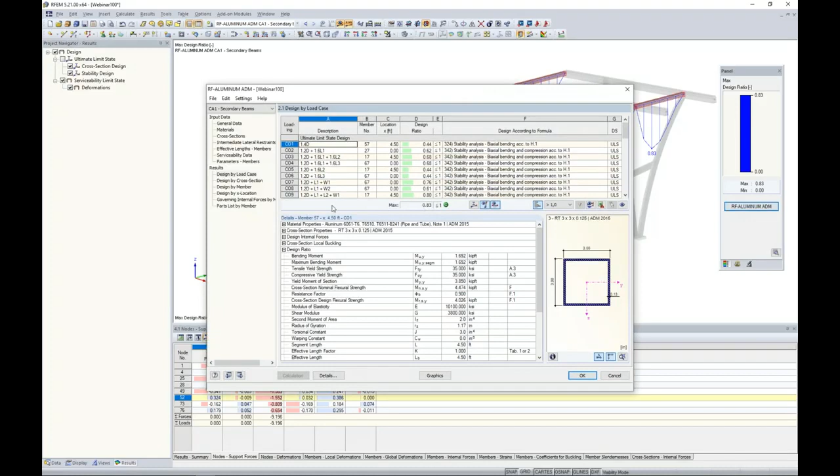We also can go back to the ADM module and view a parts list by member. Again, all this information can be exported directly to Microsoft Excel. So that's just a quick introduction to the aluminum ADM module with a fairly simple example for these beams.

The other quick example I want to show you is, of course, with our custom extruded sections that we brought in from ShapeThin and how we can also design those within the module.

Notice that the program has broken apart these members here based on where they were framing into the columns. And actually, that's not a big deal at all.

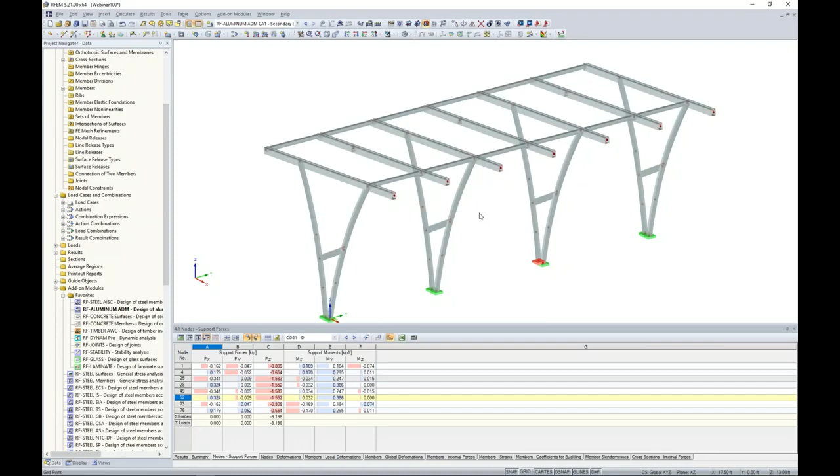So what we want to do here is under the Views tab, I'm going to select all of my ShapeThin sections, and we'll turn off my 3x3 sections. I can highlight all of my members here.

I can right click, and under member we have the opportunity to create sets of members. So what the program does is it groups these individual members into what's called a set of members, which just places a very faint dotted line around these segments.

You'll notice that I didn't have to clear my results for the analysis. It does not affect the analysis whatsoever that these are broken apart into separate segments. But for design, maybe we are interested in designing this as one continuous member rather than individual segments, which, by the way, both are possible. But I just want to show you the benefits of designing a set of members quickly.

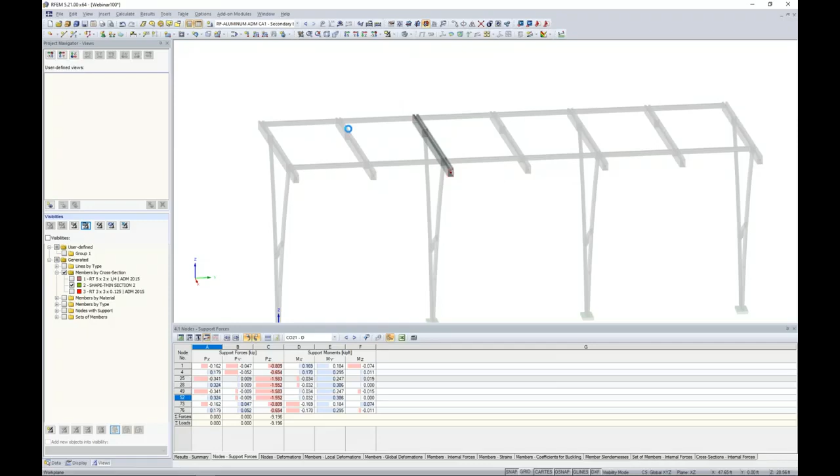So we'll start off by designing our set of member that I've shown highlighted here. We go back to our RF-ALUMINIUM ADM module, and I'm going to go to File, New Case. For this one, I'm going to call this one Main Beam. I click OK. What the program gives me the ability to do is to always jump back to my secondary beam design. So I've just created a second case here within my dropdown.

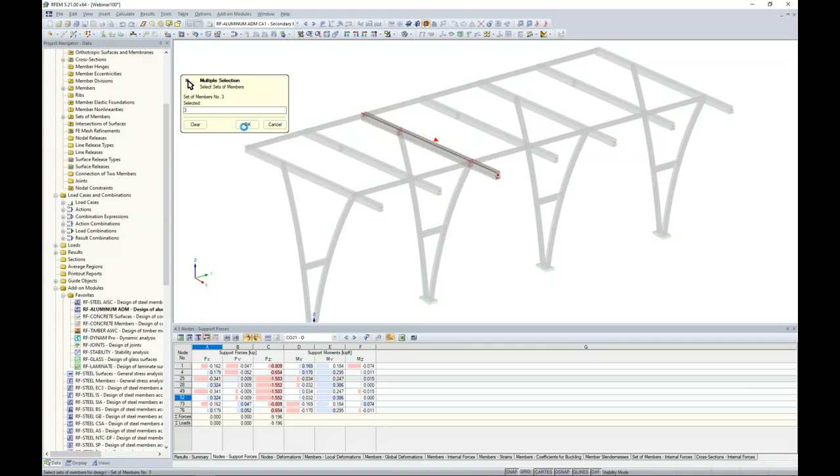This time, I want to design my set of members here. I click OK. Now, quite honestly, not much is different with sets of members until we get to some of these later tables.

I want to select all of my LRFD load combinations according to the LRFD 2015. Now, I will skip over serviceability limit state design just for the sake of time. So we'll only take a look at the ultimate limit state design. And then we're just simply moving from top to bottom with our tables here with materials.

Notice the cross section for our ShapeThin custom extruded section is available here with all the cross section properties that we calculated way back when.

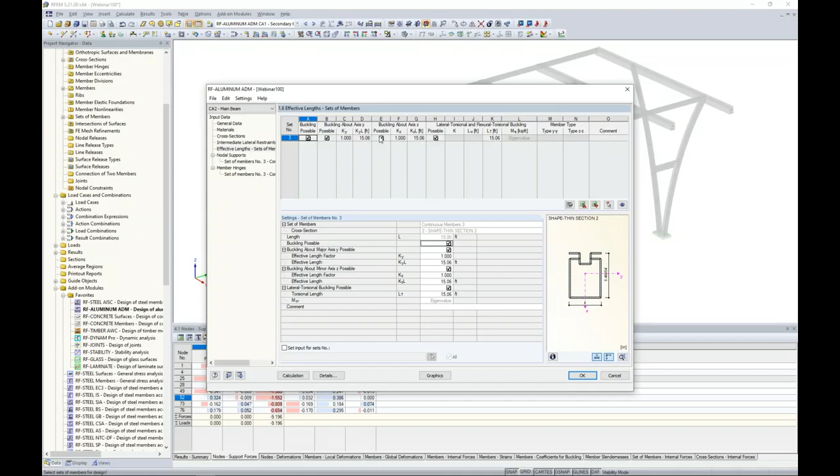The effective length. So this table looks slightly different than what we saw for members, and now is effective lengths for sets of members. And some things are grayed out here. And that's because everything is actually controlled under our next table for nodal supports.

So similar to members, for sets of members, we are running an eigenvalue analysis for stability once again in the background. But what's more powerful about sets of members is that we have a bit more control over how we are specifying how those 4 degrees of freedom where our supports occur are actually fixed or released.

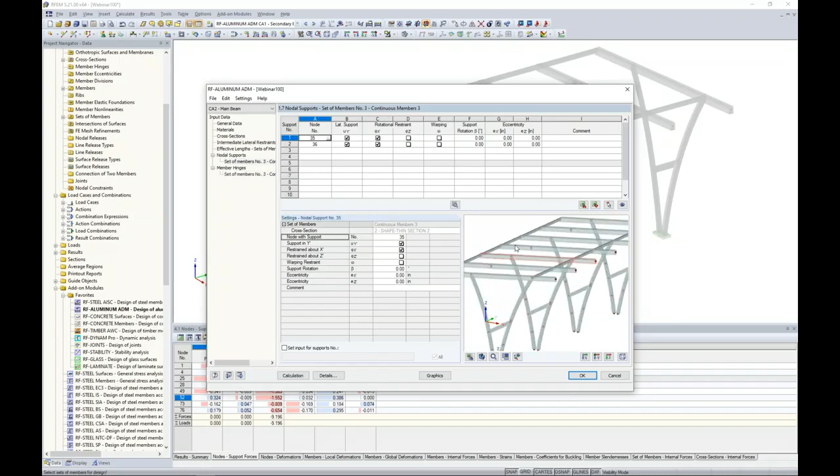So we can see here under nodal supports, which is a new table for sets of members, our individual set of members here. And I can isolate this to take a look at the set of members and where the program has automatically placed these supports.

Now, actually, this is not correct because I don't want to place a support on the right-hand side, but rather I need to move that back to where my lateral members are framing in as well as my column.

Well, that's no problem. All I need to do is just to graphically select my new node here, move it back to node 36. And actually, let's go ahead and try that again. I want node 36 and I also want node 35. There we go. So I've supported this individual set of members exactly where we have all these different members framing in.

Now this is where I have my 4 degrees of freedom that I have the control to set now for sets of members. I think we can all agree that we do have lateral restraint because we have these transverse beams framing in at both of these support locations.

Rotational restraint is the ability for the member to rotate about its own axis, and I would also agree here that maybe we are restrained in that aspect as well. Now, rotation about the vertical axes, I would say that maybe for our front support here with our column framing in, we do have restraint about the vertical axes for rotation.

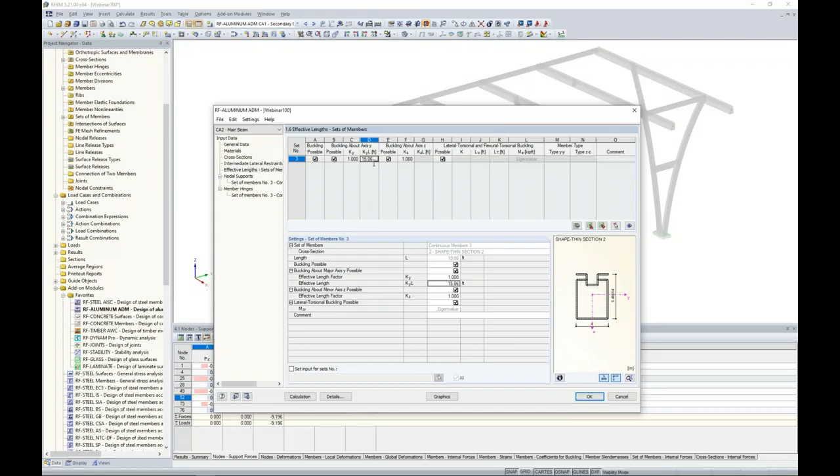What's also powerful about sets of members is that they don't necessarily have to be in a straight line. You can design a continuous member that doesn't lie in a straight line but is in the same plane. So for strong axis buckling though, we do need to adjust this, and the worst case distance here is between our two columns at 7.95 feet.

So the last table here is member hinges. If we wanted to release any one of those four degrees of freedom along the set of members, we could do so here, but we don't have that for today's example.

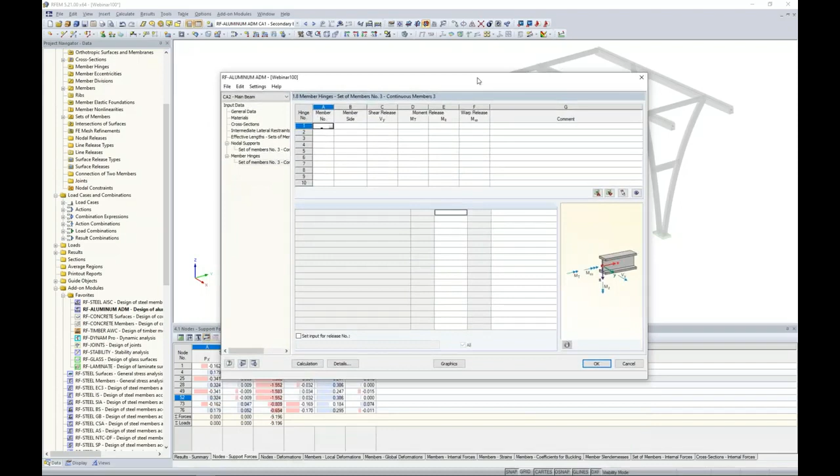So then I can just click calculate. Again, it solves within a quick second, and we're presented with our results, and we can view design by sets of members. So same concept here.

We're going to present to you all of the different checks directly within the standard. And I wanted to point out the course stability analysis for lateral torsional buckling. We can view our mode shape here for this set of members and what the program's actually doing in the background.

One thing I mentioned over and over again is the ability to check local buckling for these custom extruded sections. So that work that we put in within ShapeThin for the element with the thickness ratios and whether it's closed or open on either end, well, you can see here that that's now all listed under the cross-section local buckling. So every single element is listed here. It shows whether it's in tension or compression, how it's classified, the slenderness. Again, very very powerful because not a lot of other programs have this capability.

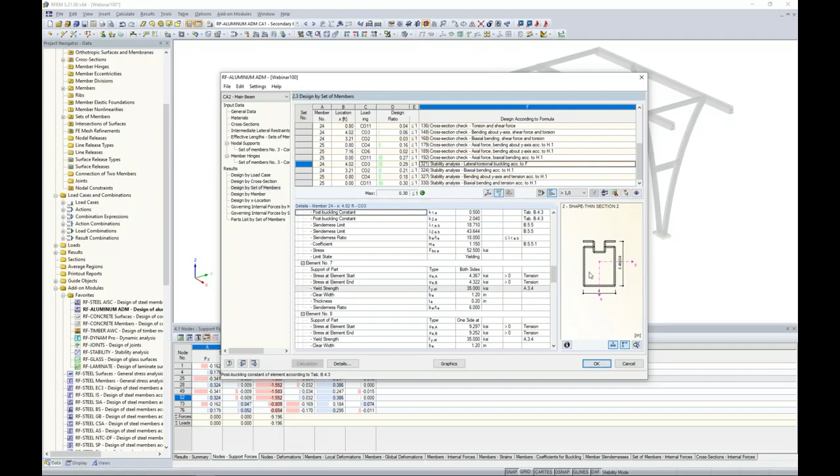Of course, we can bring it in, we can do general design, but the ability to do local buckling for all of these individual lips and webs and flanges is pretty powerful. Okay, so that's essentially what I wanted to quickly show you for design by sets of members, and that will actually bring us to the end of our webinar today.